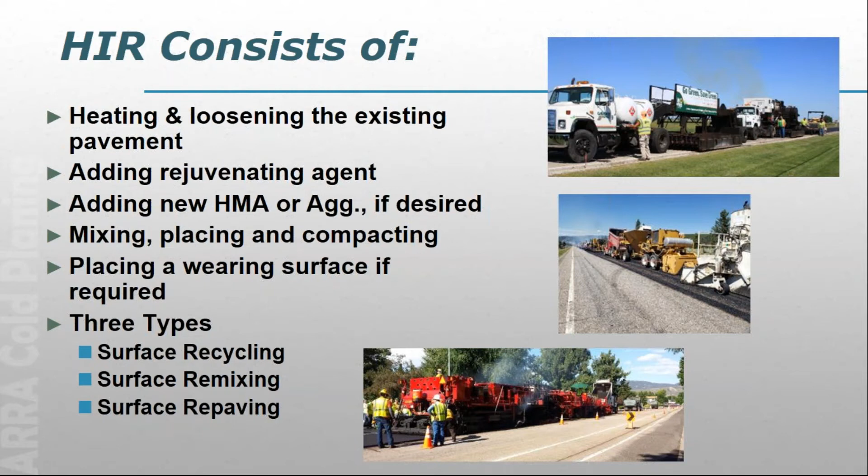That's the third one, and it differentiates from the others in that it places an integral asphalt overlay at the same time, creating a thermal bond. So you not only perform a treatment of placement, you place the overlay at the same time. And then these can all be done in a single pass or multiple pass.

With multiple pass HIR, I use a series of preheater and heater scarification units. Instead of heating and removing or loosening the pavement in one lift, I do this in a series of shallower lifts, typically 2 to 4 lifts, anywhere from a half inch to 1 inch in total thickness. This allows me to go deeper, do a deeper treatment, typically 2 inches, but they have gone up to 3 inches. By taking the pavement off in layers, I can do this without overheating the pavement.

I use a series of tunnel heaters, or I pick the material up and place it over the top of the second unit, and that's how I keep the material hot. Then the material is picked up and placed with the paver. Just like the other processes, it's more than likely going to require a surface course. So that's a real quick overview of HIR.

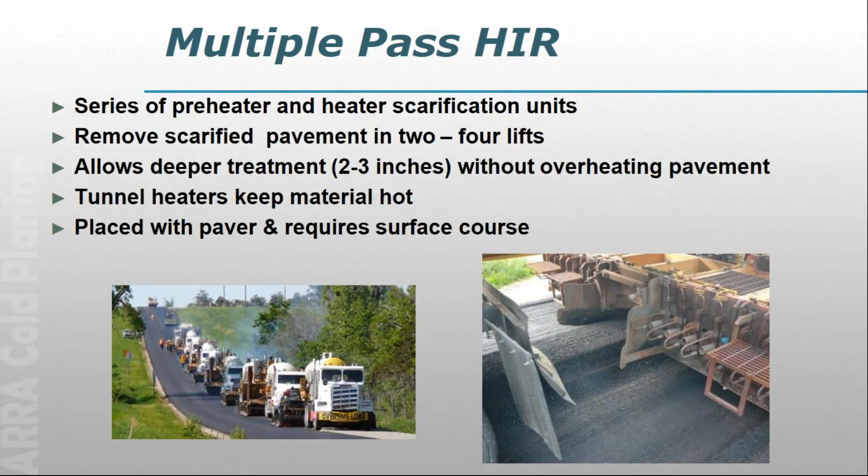With cold in-place recycling, I take a recycling train and run it over a distressed asphalt pavement. I mill that pavement up, add a recycling agent to it, place it back down, and compact it cold. So it will go down with higher air voids than was originally there, and it will require a surface course of some type to protect it. Typically I want to leave about 1 to 2 inches of asphalt below the recycled layer just to support the weight of the equipment, which can be quite heavy, and I do not want it breaking through the pavement.

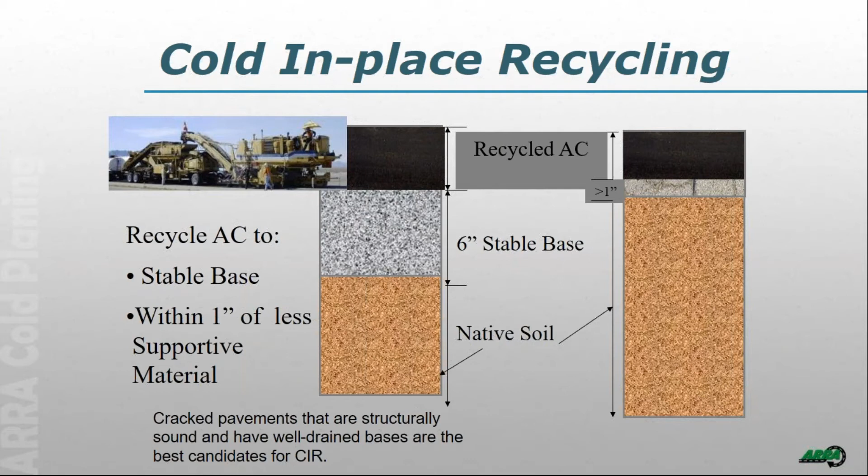We have had instances where if I have a very good quality and very uniform aggregate base, I can remove all of the asphalt. I just do not want to be jumping in and out of aggregate base. I want as consistent of a mix as I can, because jumping in and out of aggregate base will cause problems with my recycling agent content.

Cold in-place recycling works best on cracked pavements that are structurally sound and have well-draining bases. Cold in place recycling is done with what we call recycling trains. There are multi-unit trains and there are single unit trains. A multi-unit train is a full width milling machine and a recycling or processing unit.

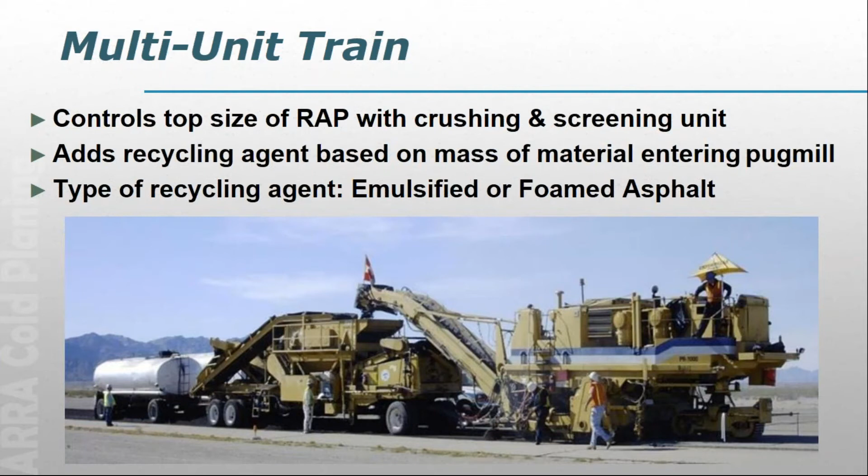So we're going to mill the RAP, drop it over a scalping screen, and the material will be screened. The oversize will run through a crushing unit and be added back through. Then the material will be dropped into a pug mill, where it adds a recycling agent based on the mass of the material entering the pug mill. These processes use a recycling agent, either emulsified asphalt or foamed asphalt. Then it's placed and compacted, and it will require a wearing surface.

Single unit trains work a little bit different. All the mixing takes place in the cutting housing. They control the top size of the RAP with the down cut and forward speed of the unit. The recycling agent is added in the cutting chamber volumetrically, based on the assumed unit weight of the material and the volume of material being processed, or the forward speed. Again, the recycling agent is either emulsified asphalt or foamed asphalt.

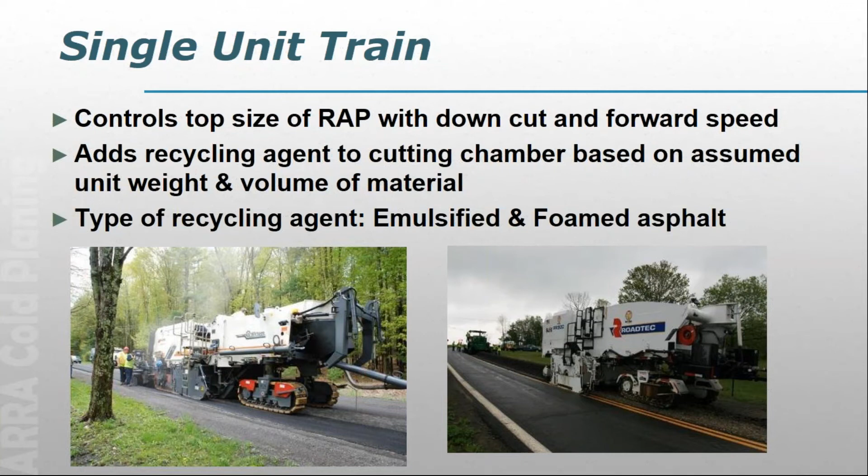Just some general overview then: hot and cold in place recycling are both pavement preservation techniques and can be corrective maintenance techniques as well. When combined with an asphalt overlay, which is often done, they can be classified as structural rehabilitation. Both processes have been successfully utilized on all functional classes of roadways, from interstate highways to airports to low volume county roads, in rural as well as urban locations. They are economical and sustainable, reducing carbon dioxide emissions, trucking, and use of raw materials.

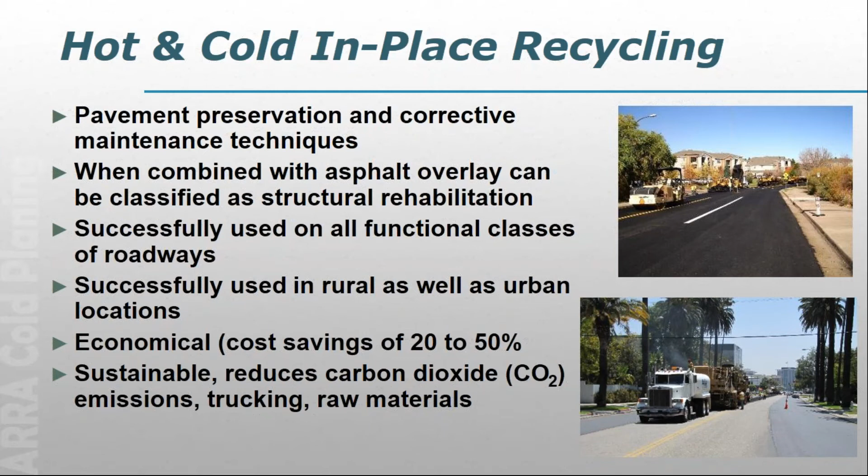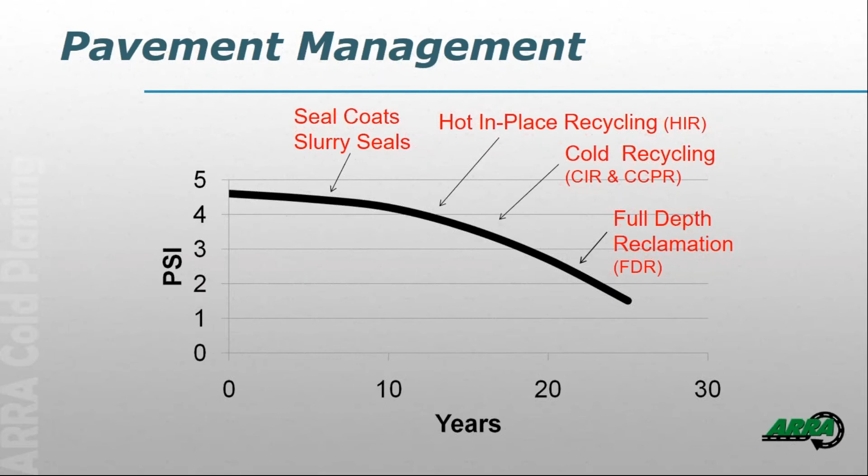So where do they fit in pavement management and on the PSI curve? Hot in place recycling is used up toward the top, where your pavement's showing some distress that wouldn't really be handled with just a preservation treatment like seal coats or slurry seals. If the pavement is deteriorated a little bit more and you're in the mid-range, you're in cold recycling, either cold in-place or cold central plant. And of course ARRA also represents full depth reclamation, which is used toward the end of a pavement's life, when it's beyond the condition where we can do a simple repair.

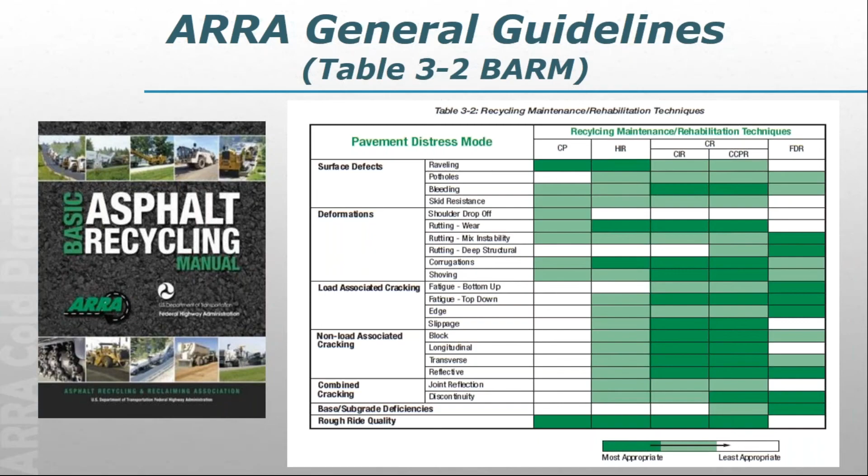As you dig deeper into the BARM, you get to the chapters on hot in place recycling, and table 6 talks about project selection. There's a comprehensive table listing conditions like surface defects, deformations, load and non-load associated cracking, and other distresses. It has columns listing the three different hot in place recycling techniques, showing whether they can handle the distress or fix the distress, and the notes tell you if not, whether they can mitigate the distress, and whatever else might be needed.

So they describe the HIR subdisciplines and the distresses. There are also notes that clarify if we can mitigate the distress or if other actions are going to be required. Now, if you don't have a copy of the BARM, I can tell you how to get one, but I'll be telling you in just a minute about our new webpage, roadresource.org.

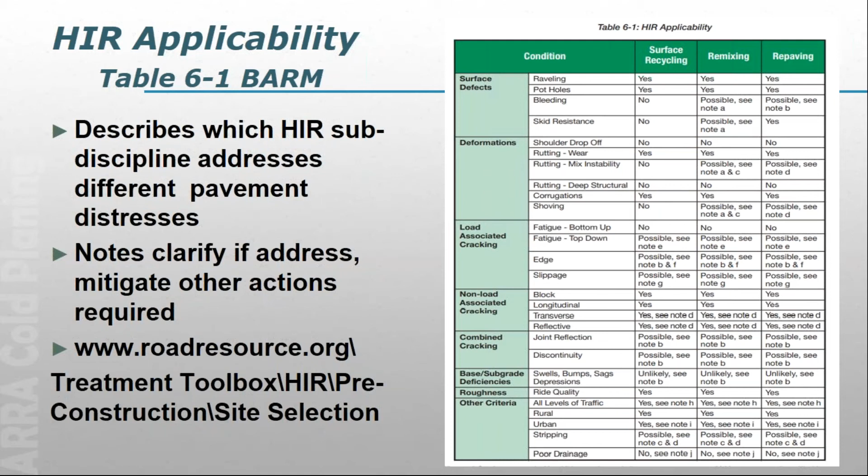These tables are in roadresource.org. They would be under the treatment toolbox, and then you would select HIR to get this table. Bring up another page, and you'd have to select pre-construction, then it's under site selection, and there's a link to this table. In summary, HIR is most effective as a maintenance or minor rehabilitation process.

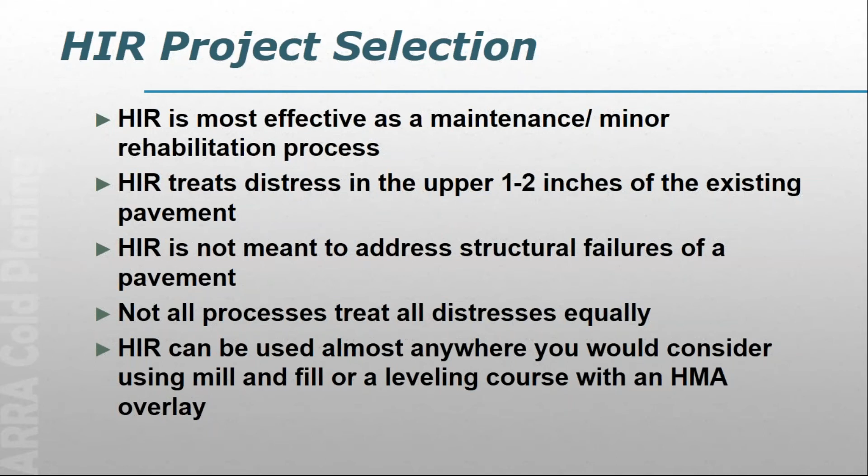It's going to treat distresses that are generally confined to the upper 1 to 2 inches of the existing pavement. It's not meant to address structural failures. Not all processes treat all distresses equally, but as a rule of thumb, HIR can be considered almost any time you would consider using mill and fill or a leveling course with an asphalt overlay.

Moving on then, covering the same thing for cold in place recycling. ARRA puts this under a category of cold recycling that covers CIR and CCPR. There's a similar table to what you saw for HIR — this is table 10.1. It lists the conditions and whether CIR or CCPR can correct the distress. The notes give you more information about whether it might just mitigate it, or any other actions that might be required.

Again, this same table is in the BARM, or can be found at roadresource.org under the treatment toolbox. I need to go to CIR or CCPR, pre-construction, and then site selection. So some very detailed information in these two tables.

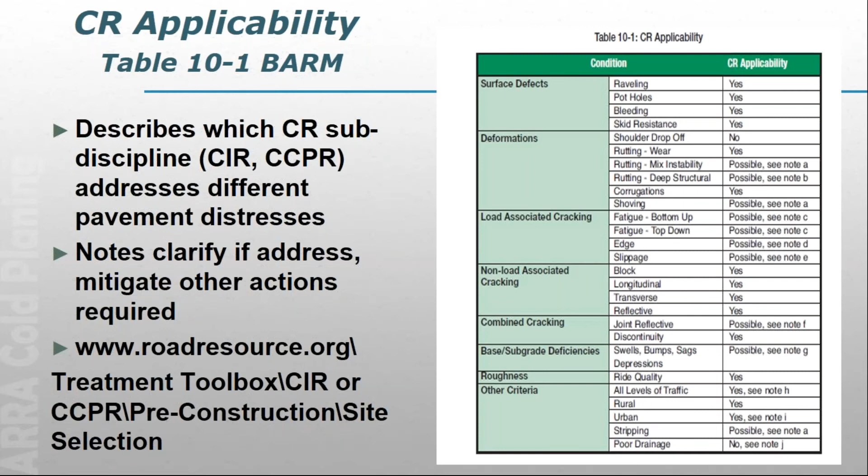So a general overview of CIR. These processes are really not suited to address major structural failures of the pavement, such as structural rutting, severe fatigue cracking, or base subgrade instability. They're not going to get down deep enough to address that. It's really meant to treat all non-load associated distresses and most structural distresses that occur in the top 2 to 5 inches of the pavement structure.

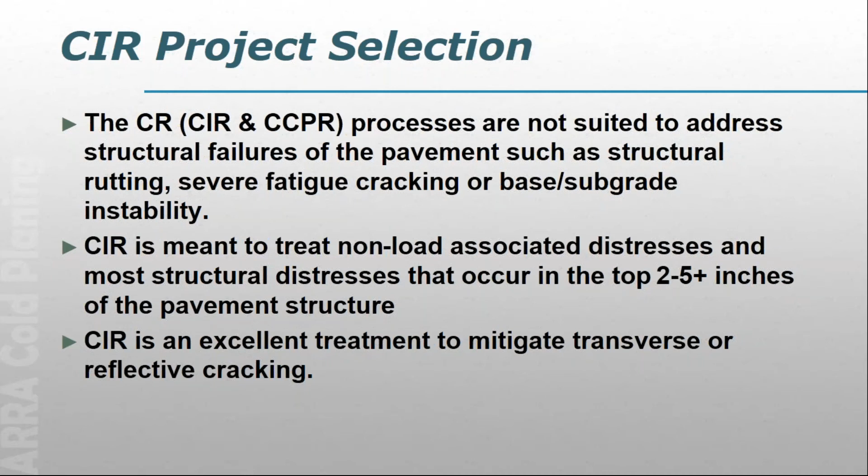CIR really is an excellent treatment to mitigate transverse or reflective cracking. It's a very economical way to remove a lot of that existing crack, and the more crack you remove, the less likely it is to return.

As far as other resources, we have a new webpage, roadresource.org. It's been out for a couple of years. This is the overview or the home page. There's an about section, and we're going to look at the treatment toolbox, and my ARRA information is under the recycling section as well.

If I click on treatment toolbox, it pops up and gives me 3 options: which treatment is right for my road, and I can explore by pavement condition or by pavement photos. Then there's a treatment resource center, and I can find a contractor.

If I decide to explore by pavement condition, I can come up at the top in those boxes and put in my pavement condition or PCI rating of the pavement. I can enter the primary distress. There's also a box for road type and surface type, but for my treatments, that really doesn't have an effect — I can work on any road type and any surface type.

Once you put in the pavement condition and the primary distress, over on the left are all the treatments covered in the web page, and they'll fade away, leaving only the ones you could consider for this distress. If you clicked on one of those, it would take you to the Treatment Resource Center where you could find out more information.

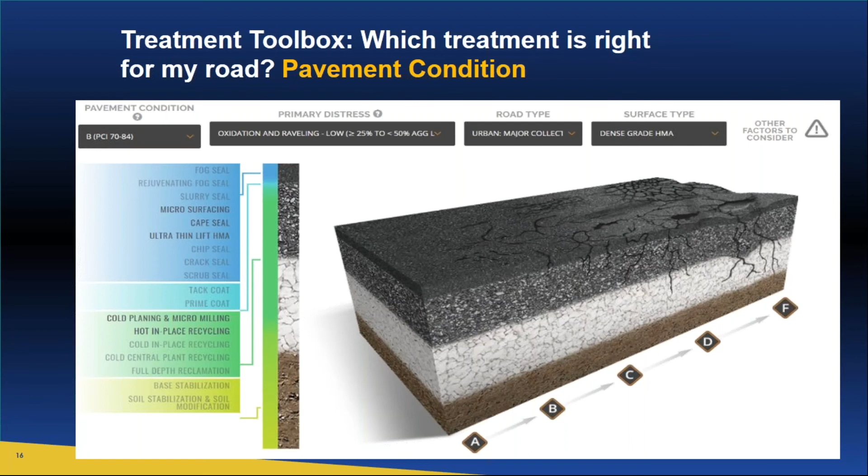You can also explore by photo selector. I would warn you to be a little careful with this — it's kind of hard to tell exactly what's going on with the road by looking at a picture. But the photos are sorted by pavement condition. You find one that looks like yours, click on it, and it'll give you some options.

If I were to click on just full depth reclamation, it would take me to the Treatment Resource Center under full depth reclamation, where I could find more information. That's the Treatment Resource Center page.

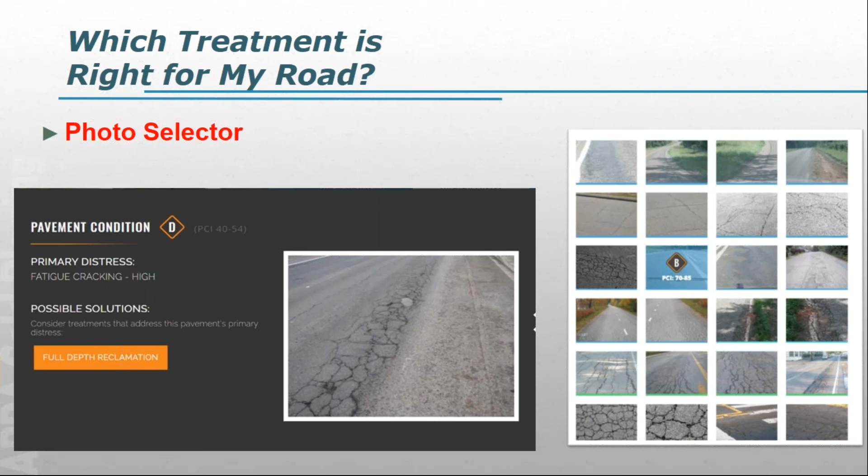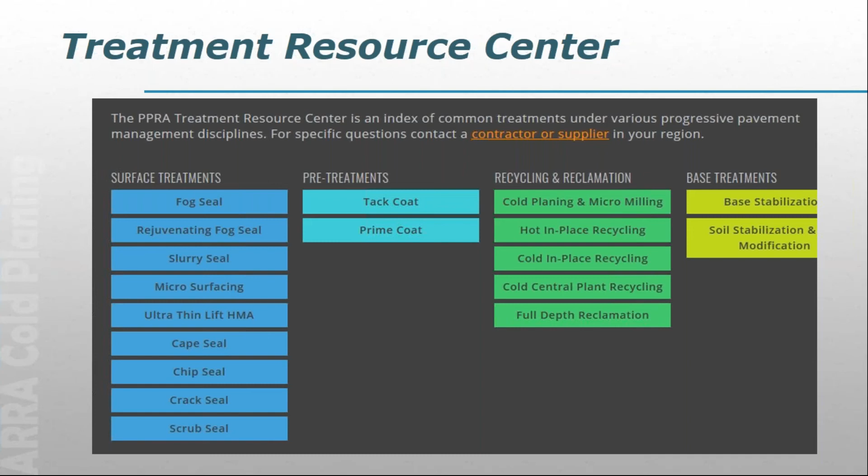The green ones and the yellow ones on the far right are mine, and if you click on those, they will take you to basically an abridged version of the Basic Asphalt Recycling Manual.

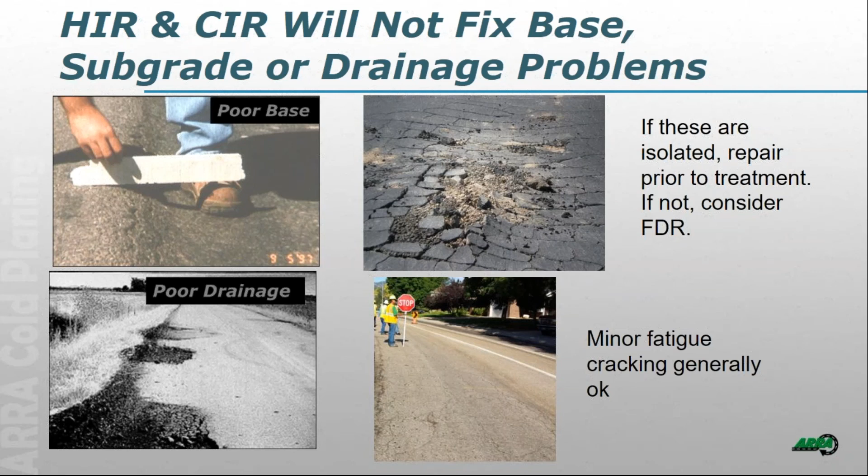A couple things to keep in mind: HIR and CIR are not going to get down deep enough. They're not going to fix base problems, subgrade issues, or drainage problems. One question that comes up a lot is fatigue cracking, and minor fatigue cracking is generally okay—it can be treated well with these treatments.

It's an in-place recycling process, so I need to know what's there. You really need to cut cores or do some other type of exploration and find out what you have. I want to verify that I have sufficient thickness to recycle the pavement to the planned thickness, so it's a good idea to have a minimum of 1 and hopefully about 2 inches of asphalt below the recycling depth to support the equipment.

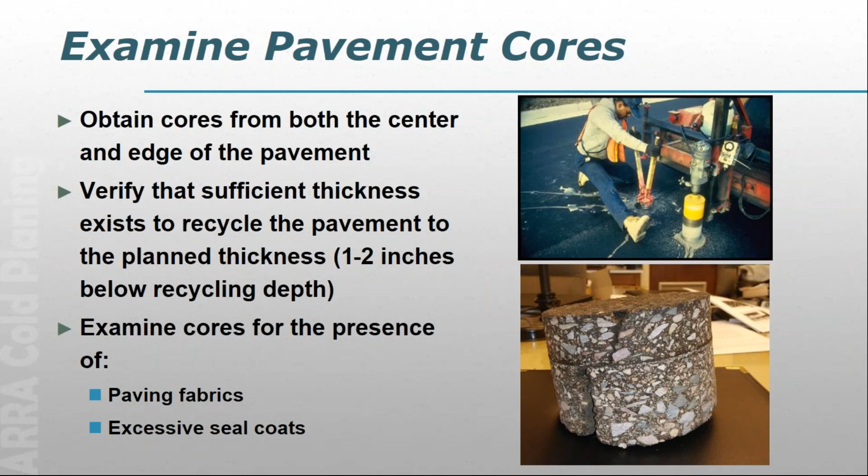I want to examine those cores for lots of things: presence of stripping, how thick the cracks might go, but I also want to look for paving fabrics and excessive seal coats. I want to be sure that if I'm doing HIR, there are no paving fabrics within about 1 inch of the planned recycling depth. HIR simply cannot recycle paving fabrics.

Paving fabrics can be recycled with CIR—it uses a milling machine, just like a mill and fill operation. But the contractor needs to know that it's there and where it is, and he's probably going to have to add some extra people to his crew to either remove the shredded fabric off of his scalping screen or pick the larger pieces up out of the recycled mat. So it can be recycled in CIR, but not HIR.

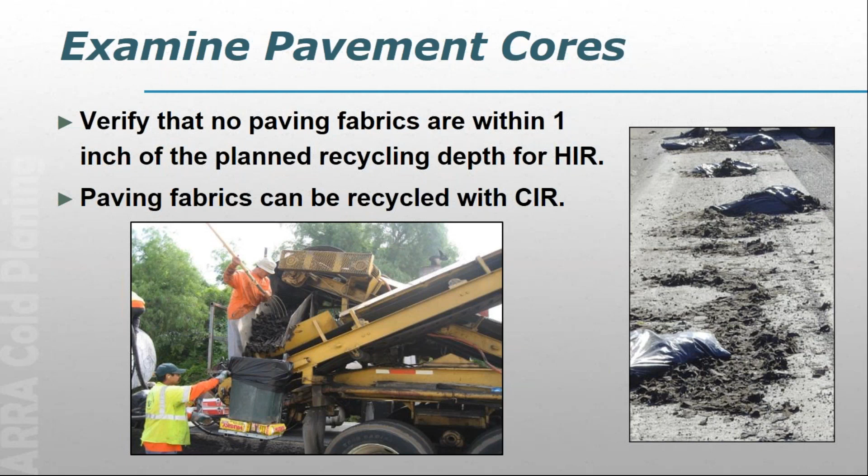Existing chip seals or slurry seal coats can be an issue with HIR, but not usually with multi-stage HIR or CIR, due to the greater treatment depth—I'm mixing these seal coats in with more material, so it's not that much of an issue. These seal coats can also inhibit HIR heat penetration. Excessive chip seals or slurry seals are high in asphalt content, and with a thin treatment, they can cause an over-asphalted mix.

So I have a couple of options. I can check it and see how it affects the mix design—if my strengths are a little low, I can add supplemental aggregate or do some other things to improve that. If it's going to bother heat penetration or it's a real issue with HIR, I can simply mill it off prior to HIR.

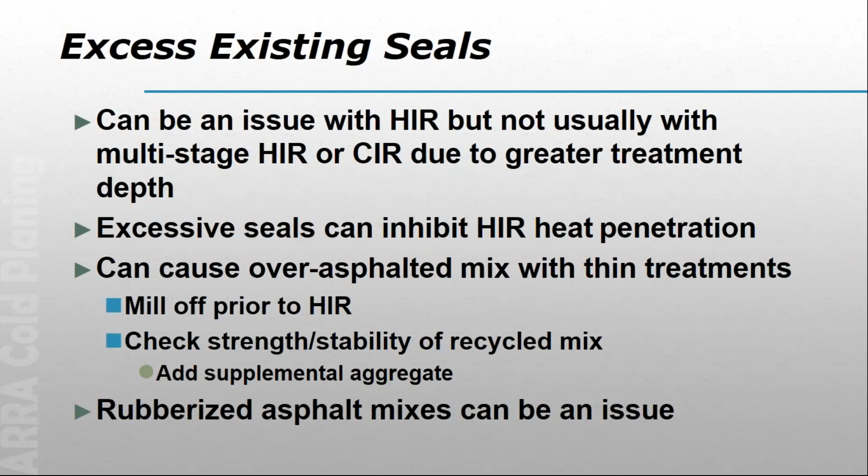And then finally, rubberized asphalt mixes can be an issue. It depends upon the type of rubberized asphalt you have, and you might need to just check with your local contractor as to whether this can or cannot be done.

Utilities are always an issue—manholes and vaults—but they're really no different for CIR than any mill and fill project. We want to be sure we locate them, then lower them or work around them some other way. With HIR, lowering the utilities is not always necessary because the tines are spring-loaded and will ride up over them, or you can raise the small milling heads.

And then last, occasionally with HIR, if you're concerned about methane gas or something in some of the vaults or manholes, you might want to check those before you run the HIR unit over the top of them.